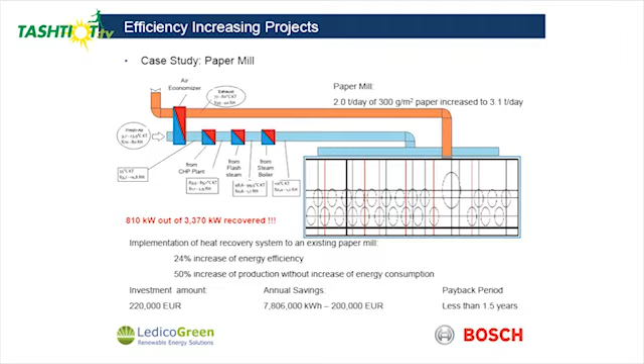As a real example, in a paper mill - this is tons per hour, sorry for that. In this paper mill, the paper comes as pulp and then gets dried, and at the end we have the paper. This is how the paper mills work. There are large ovens, not called ovens but paper mills, and it's a very strong thermal process.

In the previous version, they were just sucking in cold air and heating it with steam. What was the problem? You have to increase the temperature of the air before you can even make the drying happen. And they were using continuously lots of steam.

Today it's still in the installation process. The job we made together was because they wanted to save energy and increase production. Today they are using the same energy, but now they are producing almost 50% more.

What have we done? Their hot air with humidity was just thrown away. Today it's going to an economizer to heat up the fresh air.

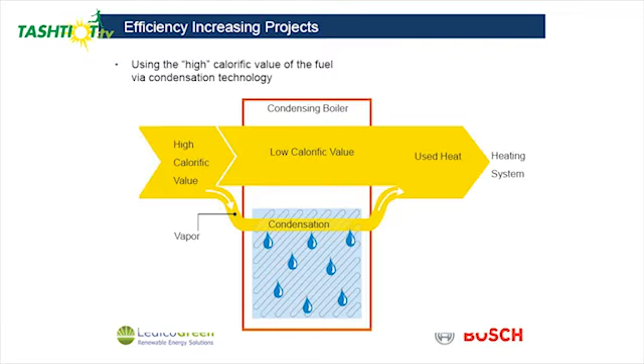Second, they planted a CHP, cogeneration, and there is also free of charge energy from jacket cooling - again this is now heating the air. Third, on the steam process, we gathered all the condensate together and produced flash steam, and again free of charge, we keep on heating the air.

Finally, a much smaller portion still uses steam. What happened? The new process with 3 tons an hour needed 3,300 kilowatts, and now they are using 810 of them without any additional costs.

The air was entering between 3 to 23 degrees, and the humidity was something like 70-80%, so the drying process wasn't good enough. Today, out of the same process, the air is reaching continuously 110 degrees, and the humidity is 0.5. So their drying process is enormously efficient now, and at the end they produce much more.

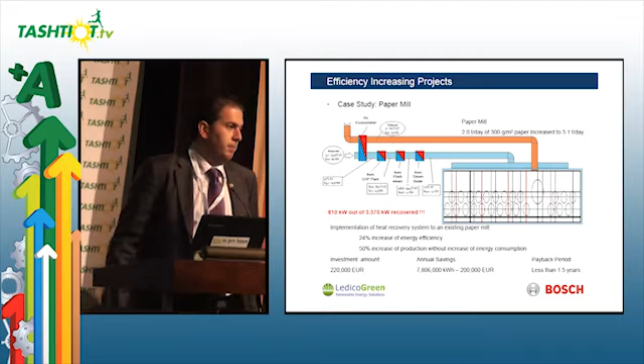So what happened? They invested 220,000 euros, and per year they are going to receive 200,000 euros back - 1.5 years payback. Again, what we have done is heat recovery - we just recovered the heat from somewhere else and used it here.

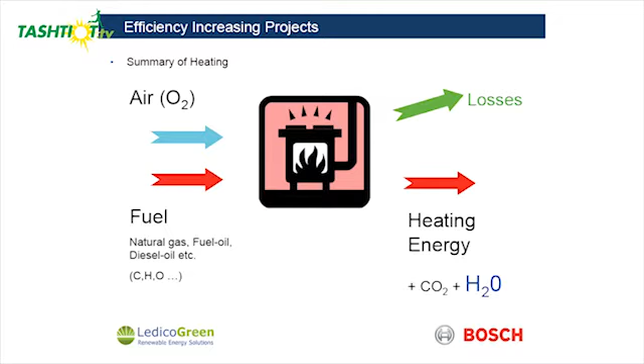Another easy project can be using a high efficient boiler, a condensing boiler. What we do in boilers is take fuel, mix it with air, and burn it - we combust. At the end we have some losses plus energy and water. In the fuels, all kinds of fossil fuels, in the flue gases of all kinds of fossil fuels, there is water.

Certainly this water is in vapor form. Vapor means steam, steam means money. So you can just throw this away, but that means from your chimney, you're going to lose energy because of temperature, because of wrong combustion, and also because of the vapor.

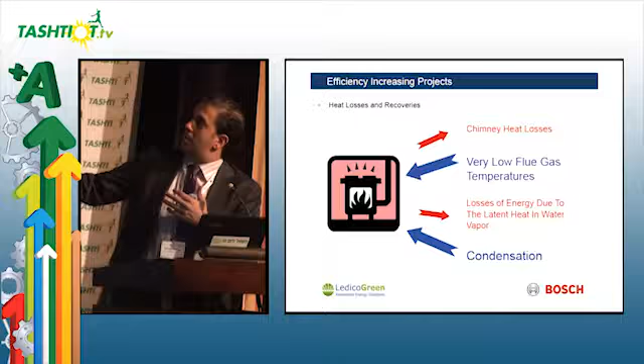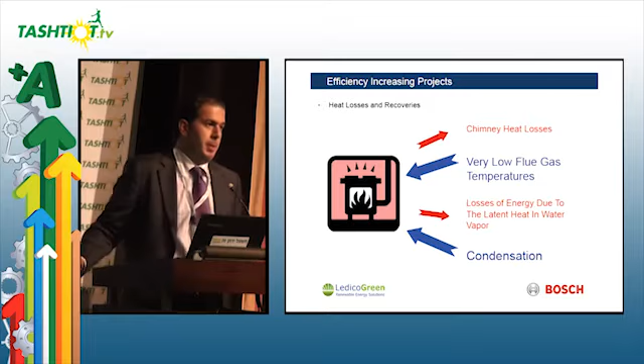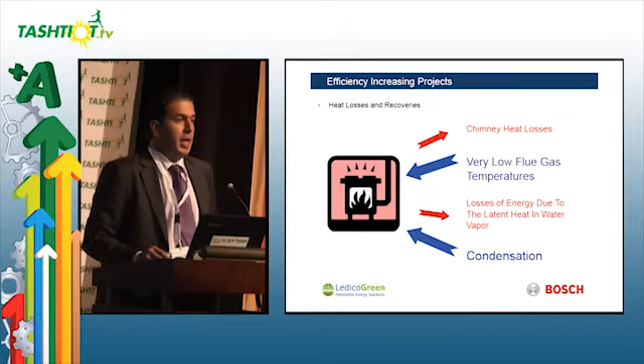So you can save the chimney losses caused by temperature, and save the chimney losses caused by wrong combustion, by making really low flue gas temperatures and good combustion. On the other side, you can save all the heat in this water vapor by letting the flue gases condense. Through that, you can reach efficiencies above 100%, up to 110%.

Where is it coming from? For instance, as an example of natural gas, this energy inside the water vapor is 11%. Can you imagine? European standards were just disregarding this energy, saying this energy is not usable, we cannot use it, therefore we take it out and call it the lower heating value.

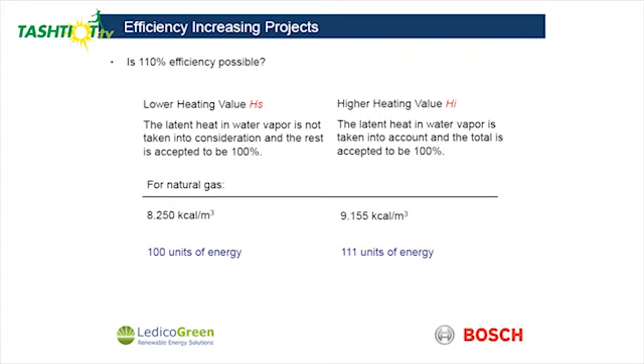We were expecting that 1 cubic meter would give us 8,250 kilocalories. In reality, there was more energy in it, but we were disregarding it. Whenever the condensing boiler started, it was just like magic - the same 1 cubic meter we put in, but we receive more, and when you calculate, you are above 100%.

That means in reality, there is nothing above 100% - in reality, we were just disregarding this energy. Now we are using it. Same process, everything is the same, I make the same heating, but saving a lot.

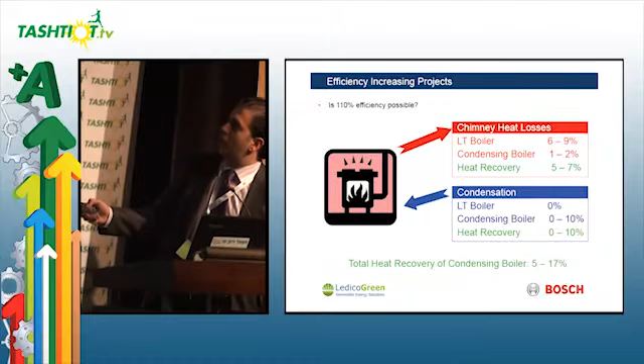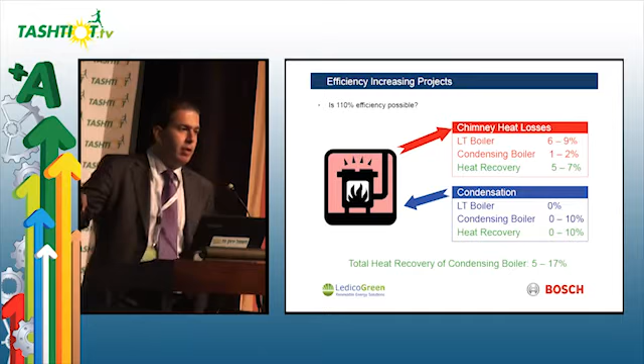So during combustion, by decreasing the chimney heat losses, I can save up to 7%. On the other side, by making condensation, using a condensing boiler, I can save up to 10%. That means my same factory, doing exactly the same, is going to save continuously up to 17% or even more.

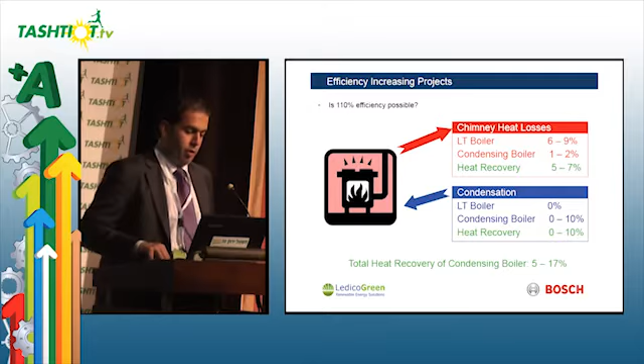And condensing boilers have large capacities also. Today you can find condensing boilers starting with 11 kilowatts up to 20,000 kilowatts, 20 megawatts. A city can be heated by using a condensing boiler also.

Believe me, in Europe, in Germany, the market share of non-condensing boilers is almost disappearing because it is nonsense to use that. In Turkey, in Istanbul, floor standing boiler business is about to die, especially capacities up to 1,000 kilowatts.

There is no reason that I'm going to put something because it's cheap and pay 20% more, while my neighbor doing the same and paying 20% less.

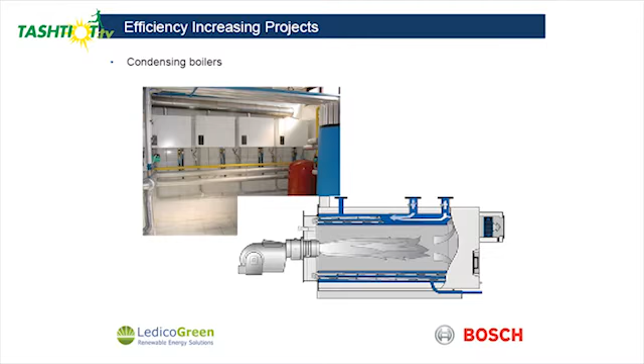They are also saving a lot of space. So taking out and putting the same capacity in condensing is allowing you to save space there. So condensing boilers are also better boilers.

So if you are talking about a different system, a steam system maybe, boilers have continuous losses. This is the weird thing about it. So you save a lot and also you lose a lot at the same time. We can say boilers lose from the chimney generally, and boilers lose energy during operation, during cooling also.

Cooling means the boiler is standing there, okay, and from the body we are just losing energy. When the burner is on, we are calling it cooling. When the burner is off, the same energy we are calling standby. During standby, we lose energy.

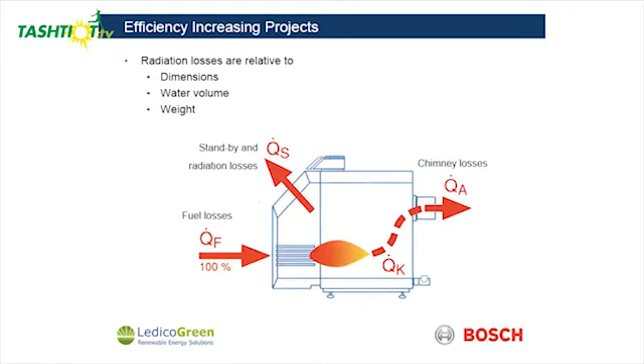So in total, this energy amount can be 2%. So then comes the same question, if 2% is important or not. If yes, I have to find a way. On the other hand, chimney or combustion losses can be 7% or more.

In order to save standby losses, the best way is I don't make any standby. If I don't stop, there won't be any standby losses. How can I prevent stopping? Very easy. Why is a boiler stopping?

Demand is over or demand is low. So that boiler says, okay, I cannot do it anymore, I have to stop. So then a good way can be, even the demand is low, the boiler can follow this capacity. This we call modulation of capacity.

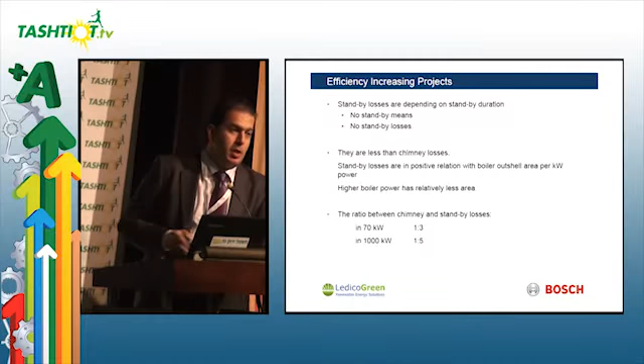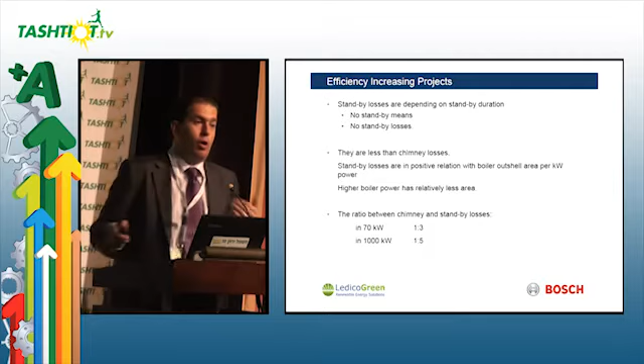So for many years we had on-off burners or two-stage burners. We could make only on, burner is on, off, or smaller capacity and one step more. Today, all the capacity long, we can decrease or increase our consumption.

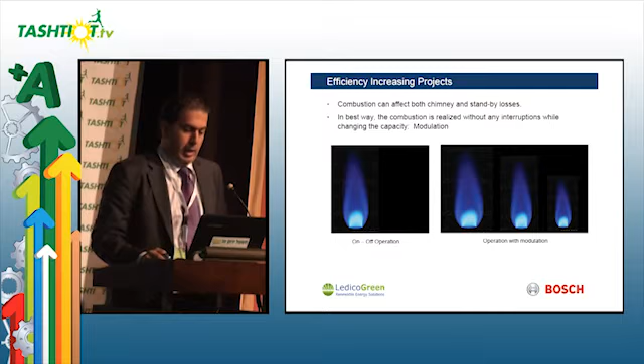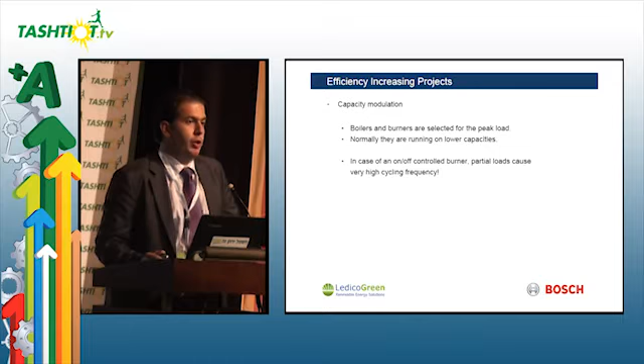And what happens? At the end, my boiler is designed for peak load. If I cannot follow the lower loads, we all know peaks happen very seldom, but the lower loads happen more. For me, if I can modulate myself, as in my boiler, I am going to save energy.

About to finish. Three minutes.

Because whenever I stop and start, I cause extra losses also. Every time when the burner starts, I throw away air, take the heat, throw to the chimney. Afterwards, I start combustion. And this starting period is very bad in efficiency.

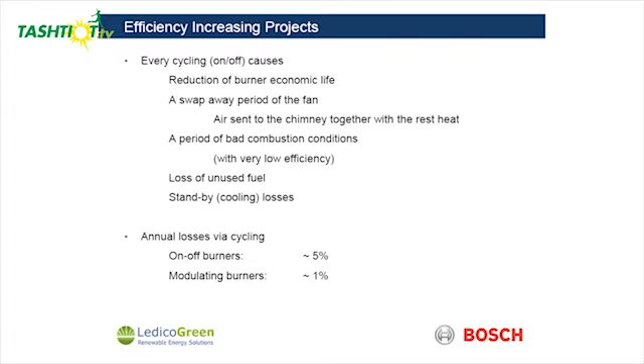So I can save only by changing from on-off or two-stage to modulation 4-5% without doing anything else. And combustion-wise, it's also very important.

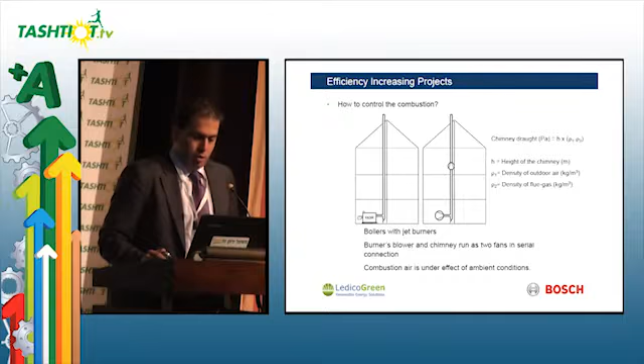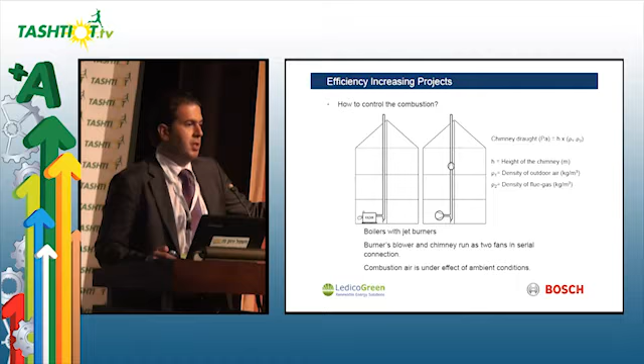So there are burners who can follow the draft of the chimney. Don't think the moment you start up a boiler, you make a setting and reach an efficiency that it will remain till the end. Daily the efficiency will change.

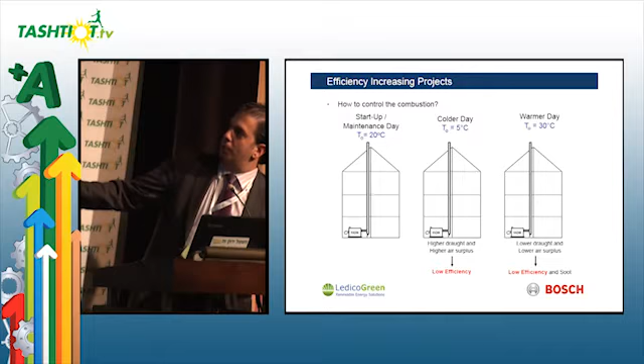So that means in high capacities, if you can have burners with pneumatic mixing, frequency control or oxygen control, you are going to create extra savings. Because you keep combustion at a high level and the chimney losses will be low and low.

Combined heat and power. Just one single thing about it. It's in reality not an energy efficiency project. What we do is we just switch between the fuel types.

Result is very well because mainly in the grids, the conversion ratio of oil to electric or gas to electric is lower than small size combined heat and power stations.

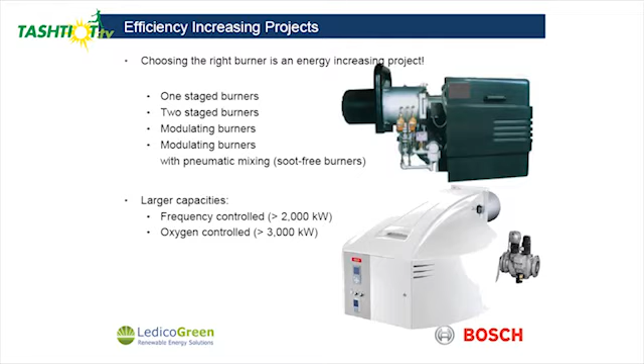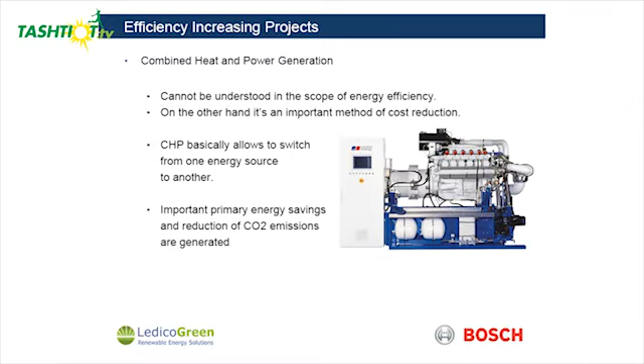One main mistake is done. Everybody thinks I have to put CHP for electricity. Theoretically, the first question for CHP is, do you need heat? If the answer is yes, second question is, do you need electricity? If this is also yes, then you can do it.

Otherwise, if you have a CHP and you produce electricity but don't know what to do with the heat, then it is a wrong investment.

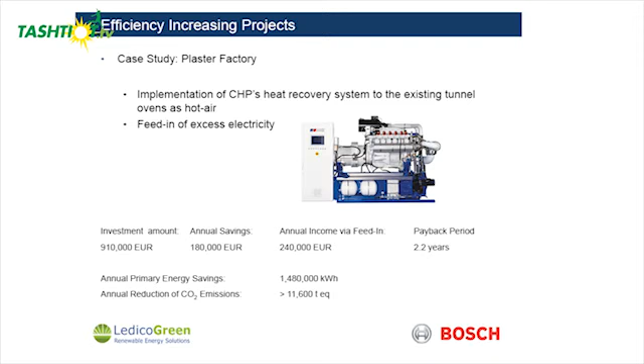So I just went again, in a plaster factory we made, they invested 910,000 euro for CHP system, and annually they saved 180,000 euro, plus the extra electricity they produce, they sold annually for 240,000 euro. As you can see, the investment was based on heat, and the electricity was for them as a bonus. So out of this, they received their money back in 2.2 years.

Everything is the same, you just switch from electricity to gas, and the result is very well.

So there might be more topics, but the time is over now. But don't forget, thermal insulation, compressed air, temperature settings, thermal storage. There are more topics about energy efficiency.

As I said, electricity and heat shall be taken into consideration at the same time, otherwise the result will be limited.